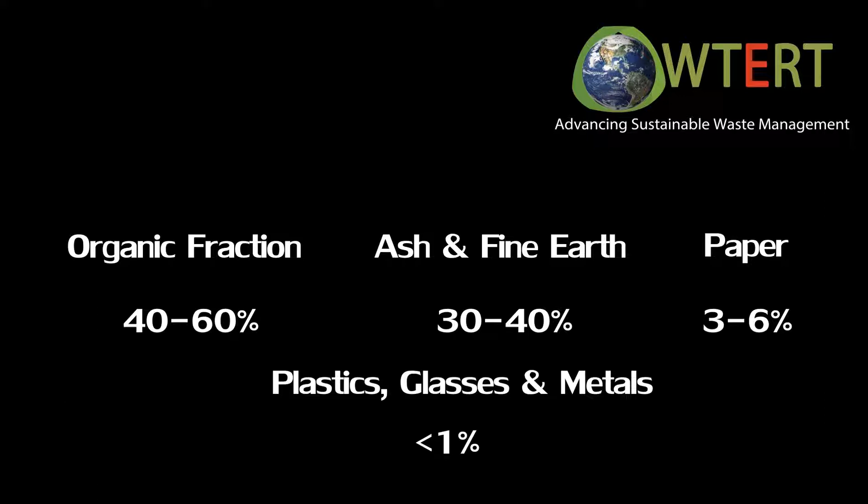According to the latest Central Pollution Control Board report, in 2016 only 23% of the total waste is processed, taken to landfills or disposed using other technologies. In 2016, the Waste to Energy Research and Technology Council determined on a wet weight basis that it consists mainly of a large organic fraction, 40 to 60%, ash and fine earth, 30 to 40%, paper, 3 to 6%, and plastics, glasses, and metals, each less than 1%.

Most cities have already made available all the land they could afford for landfills, and new land will be almost impossible to provide. By the late 2000s, the idea of converting waste to energy had caught the mind of policymakers. Waste could be processed to make fuel, which would be burned to power or burned directly so that electricity would be generated.

The status of refuse-derived fuel plants in India is not a good sign for the future, and many plants in India have already been shut down. Among 34 RDF plants in India, only 8 plants are working and few plants are coming up. The main reason for the failure of RDF plants in India is the lesser amount of waste and the low electricity production. Lack of facility for the purification of flue gas from the RDF plants is also a primary reason for the shutdown of most of the plants.

For successful waste management, vermicomposting and anaerobic digestion units, biogas plants, recycling units, and waste-to-energy power plants are a must. Purely organic waste is disposed in vermicomposting and anaerobic digestion units, or biogas plants, recycling units for source-separated marketable materials, and all remaining types of post-recycling mixed wastes are combusted with energy recovery. In this animation, we mainly focus on the final stage of waste management, the waste-to-energy power plant.

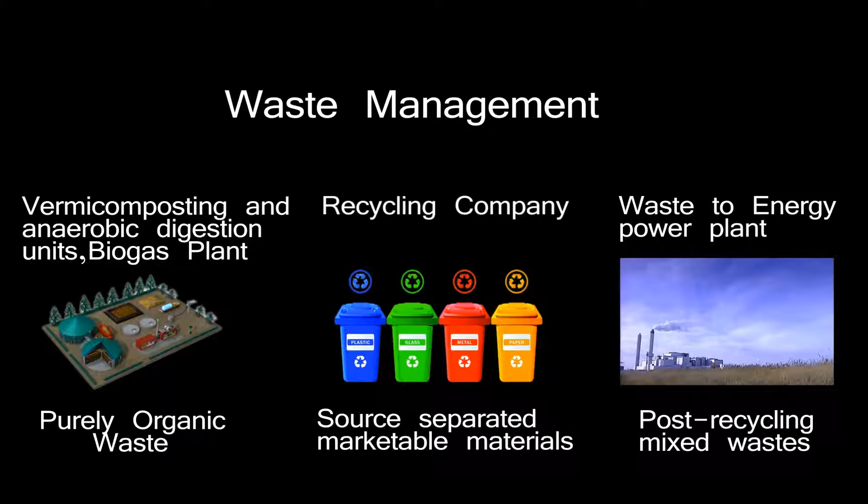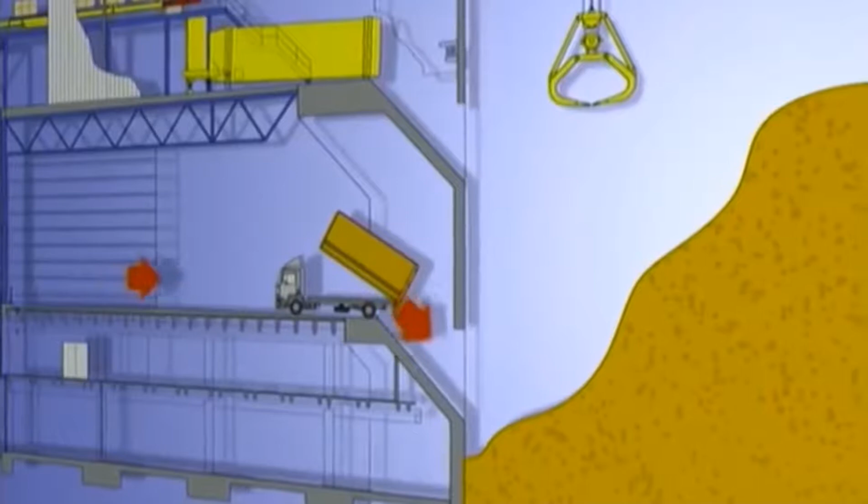In Amsterdam, the AEB power plant processes 4,000 tons of domestic and commercial waste each day. It is essential for optimal combustion that the waste is of uniform quality. This is why it is mixed in the waste bunker. A large crane then transfers the waste into the hoppers of the furnace. This is a continuous process, 24 hours a day and 7 days a week. Temperature on the moving grate is maintained between 1000 degrees Celsius and 1200 degrees Celsius.

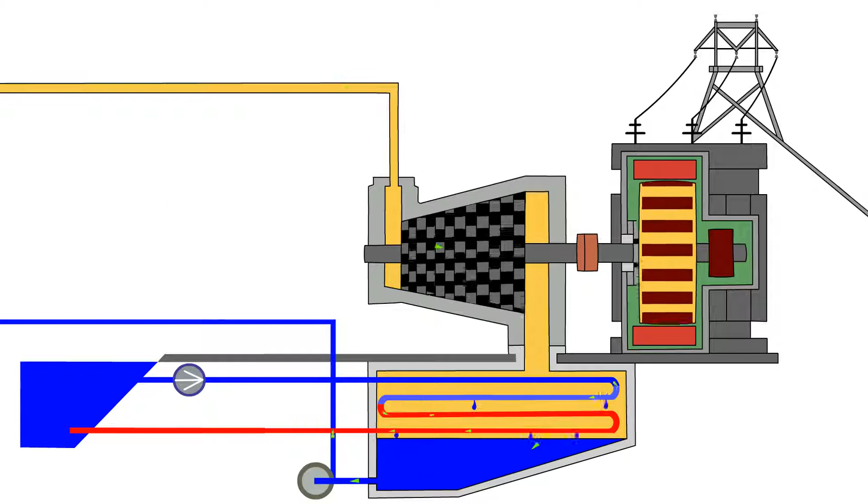This heat is not wasted. It turns water in the furnace walls or boiler water in the oven to steam. This steam passes through the turbine at high pressure, and turbines drive the generator. This generates electricity. After the electricity production, the exhausted steam from the turbine may also be used for industrial heating, by co-locating industry next to the waste-to-energy plant.

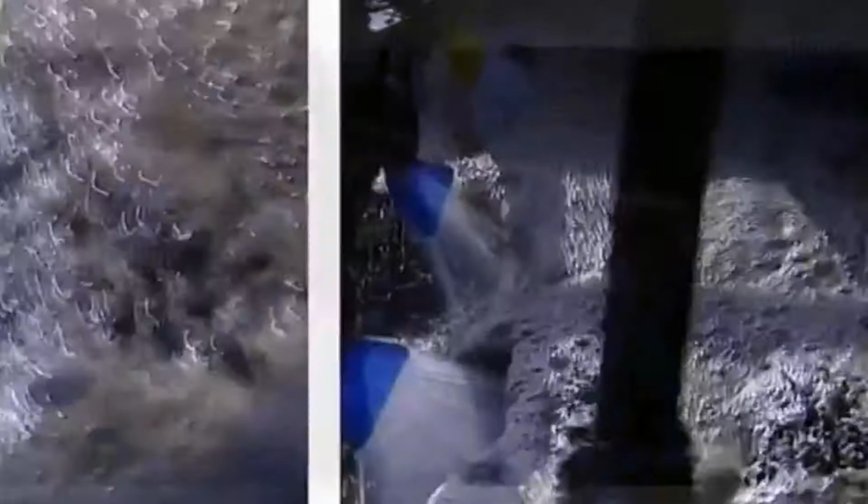Part of the waste is incombustible. This part which remains after combustion is called bottom ash. Technologies are there to wash and recover the metals from the bottom ash. A large amount of ferrous and non-ferrous metal like aluminium and copper will be returned for recycling. The rest is cleaned further and divided into sand and fine powder and unburnt scraps. High-quality materials for building roads are obtained from the sand and fine powder. The unburnt waste reaches the furnace again.

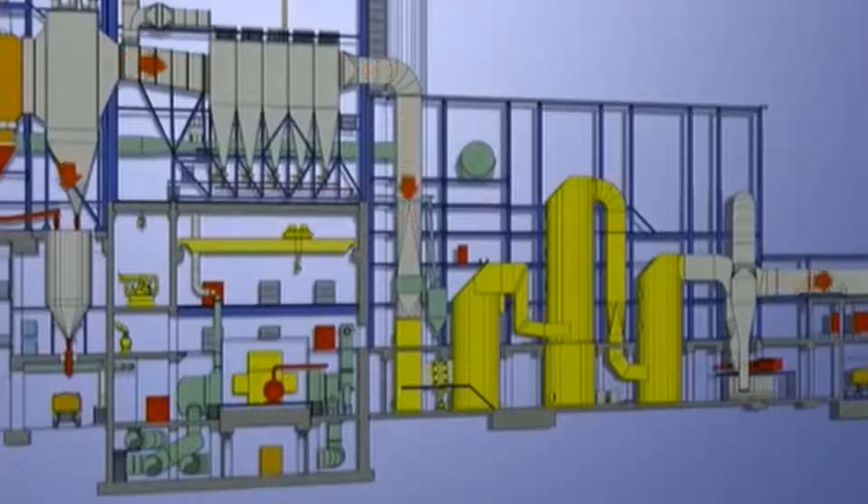After the energy recovery process, the flue gas is cleaned. This is the longest part of the production process. The air pollution control system includes ammonia injection to reduce nitrogen oxides, dry or semi-dry scrubbers to remove hydrogen chloride and sulfur dioxide, and activated carbon injection to capture volatile metals and dioxins. The cooled gas passes through a fabric filter bag house, where the particulate matter is removed.

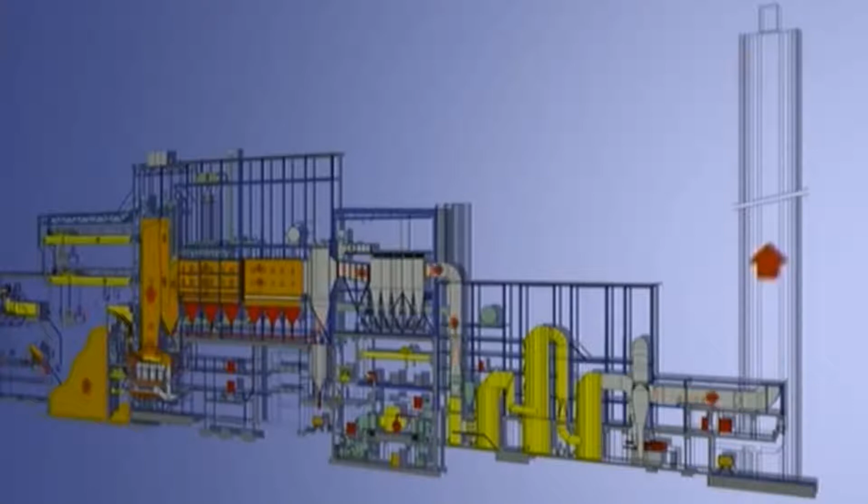The clean gas conveyed to the stack contains only nitrogen, water vapor and carbon dioxide, and must meet the stringent European and American standards. 10% of the carbon dioxide from the waste-to-energy power plant could be converted to produce methanol for fueling automobiles. A well-established technology from Iceland using carbon dioxide, water, and solar energy will reduce the carbon footprint of the WTE power plant.

Most of the existing waste-to-energy power plants are located at a distance of less than 5 kilometers from the center of the city. They range in size from 1,000 tons to 4,500 tons per day. For example, AVR Energy at Rotterdam consumes nearly 4,500 tons of waste per day, which produces 64 megawatts of electricity.

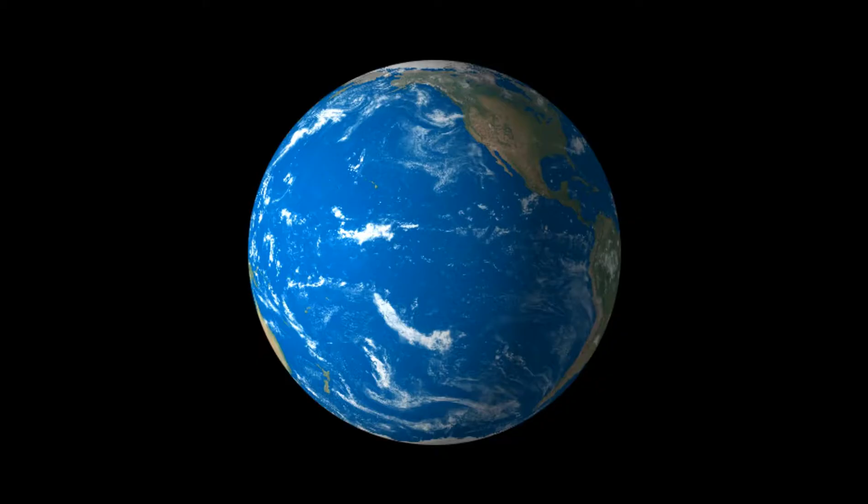A waste-to-energy power plant in South India will require 4,000 tons of waste per day, similar to AVR Energy or AEB Amsterdam. So it is advisable to use Indian Railways to carry waste from WCSCs to the waste-to-energy power plant; thus it would be easy to bring the huge amount of waste from cities even 500 kilometers away from the plant. After successful waste management in South India, we will make use of this experience to clean India and the entire planet.